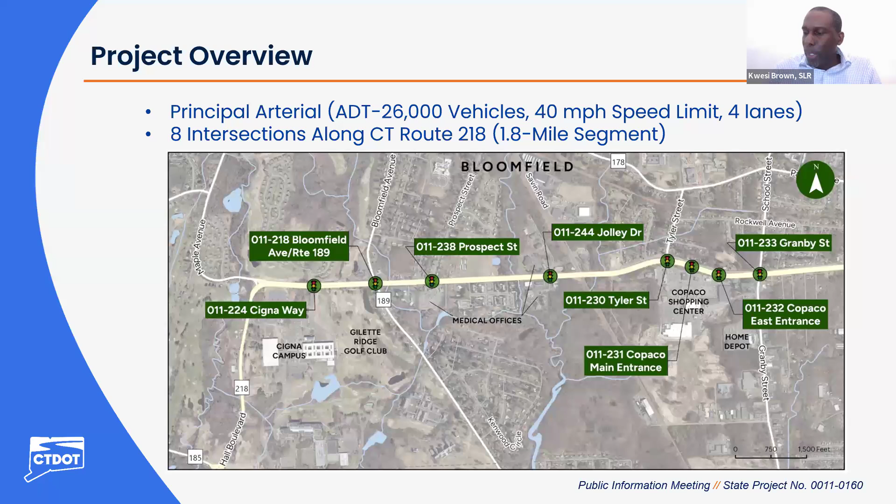Next slide, please. So why are we doing this project?

The goal, purpose, and need really is to replace aging signal infrastructure within the corridor. A number of the signal equipment is over 30 years old, and a good amount at the 20-year mark as well, so it's important to replace this aging infrastructure. Additionally, we're looking to improve traffic operations and safety, not just for motorists, but for pedestrians, bicyclists, and transit users within the corridor.

In terms of improvements, we're looking to upgrade the signal equipment at these intersections, enhance pedestrian accommodations, and introduce more cutting-edge technology, potentially flashing yellow arrow to enhance safety for left-turning vehicles, new vehicle detection, and improved communications within the corridor. Improved access to transit stops is key, along with improving illumination at transit stops and crosswalks.

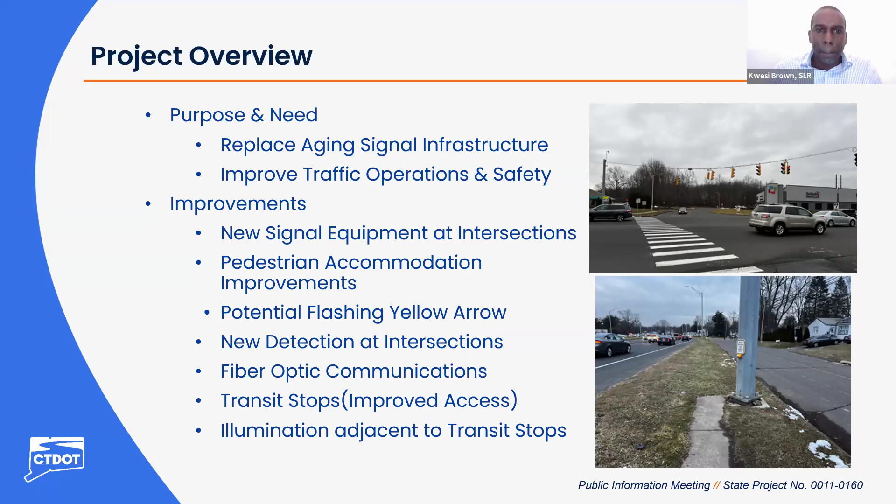Now to highlight the individual intersections in a bit more detail. This first one is the Cigna Way intersection, and you'll see a recurring theme as I go through the remaining seven. It's a wide intersection with only one crosswalk along the southern leg, the Cigna Way driveway. There's a sidewalk along Cigna Way on the western side, but very limited pedestrian accommodations, no pedestrian signals, and even the existing ramps need review since some are substandard.

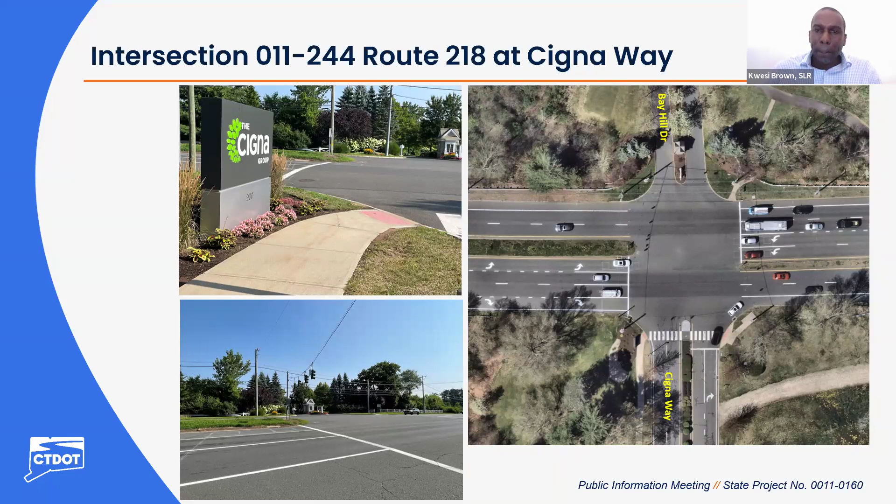Further east, the next intersection is Route 218 at Bloomfield Avenue, Route 189. This is a major intersection within the corridor, very wide, with no sidewalks, no ramps, and really no pedestrian accommodations. This intersection also recorded the highest number of crashes within the corridor for this project, accounting for about 30% of the crashes.

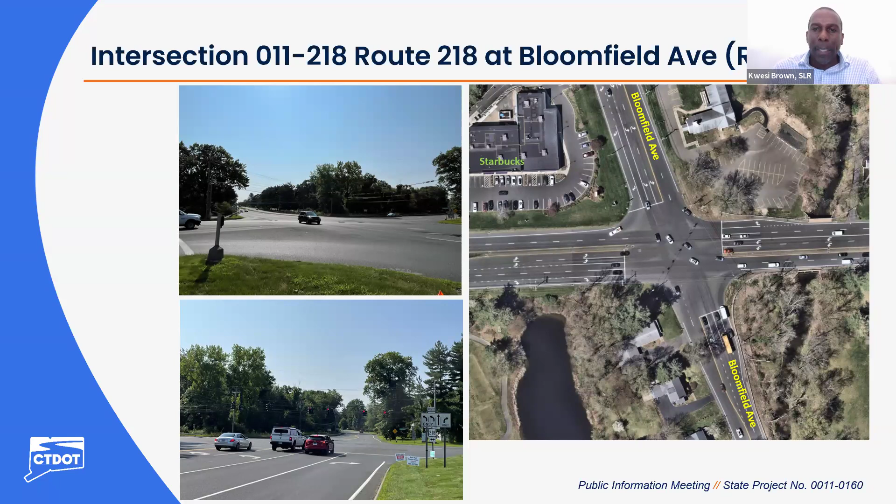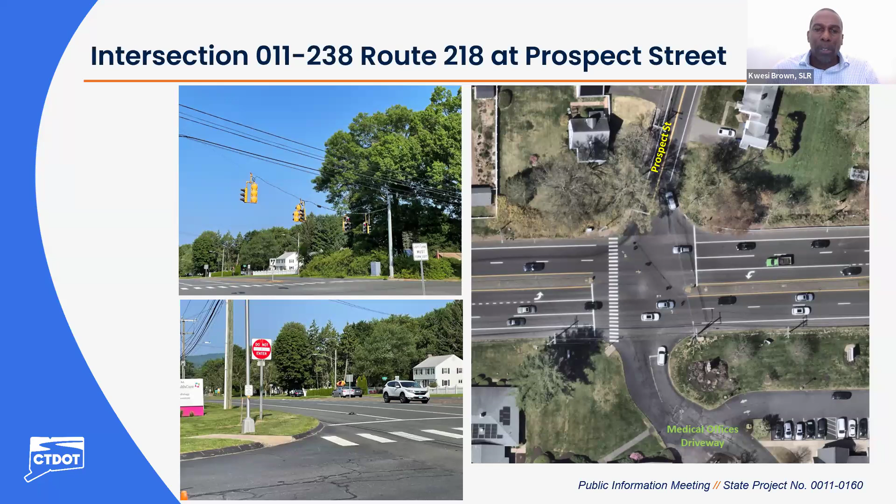The third intersection is at Prospect Street, near the 701 Cottage Grove medical offices. Again, it's a wide intersection with only one crosswalk. There are transit stops at this location, but substandard ramps for the ones that exist, and really limited pedestrian accommodations with no pedestrian signals.

At the Jolley Drive intersection, near the Hartford Healthcare establishment offices, there are two transit stops and a bus shelter at the southwest corner, along with some sidewalks. There's one crosswalk, and this is the only location with existing pedestrian signal equipment, which we'll be looking to upgrade as part of this project.

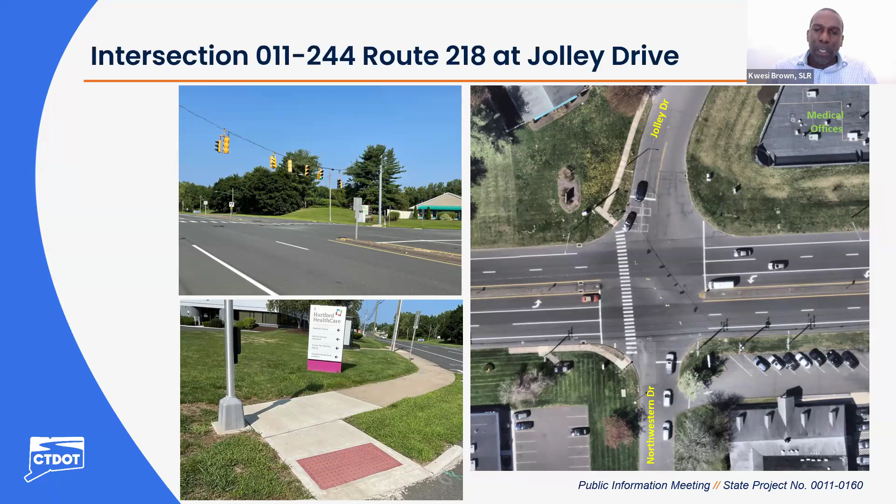This intersection at Tyler Street is the first driveway to the shopping plaza. Again, it's a wide intersection with two crosswalks, but the ramps leading to them are substandard, as shown in the photo, and there are no real pedestrian accommodations. The transit stops here are within the site, which I'll discuss further for the next two intersections.

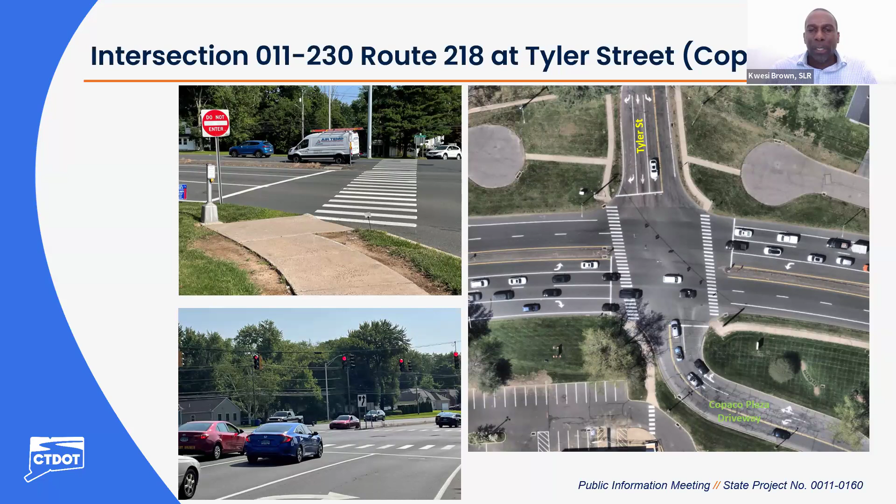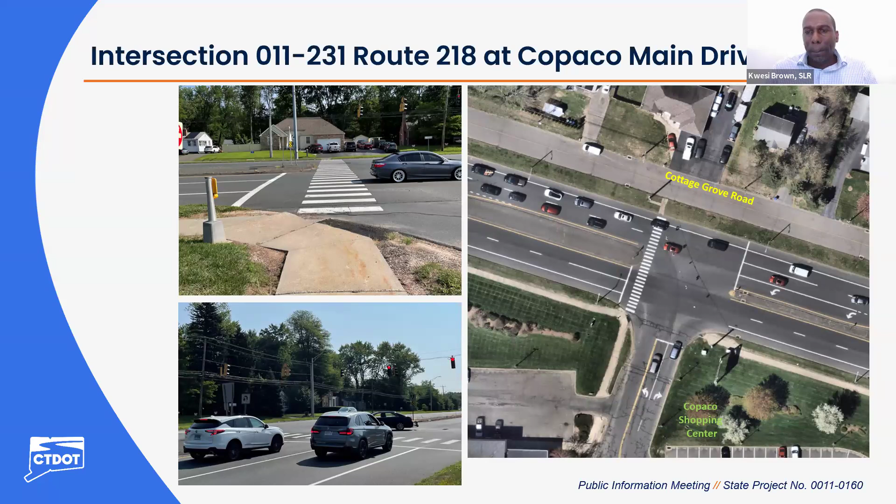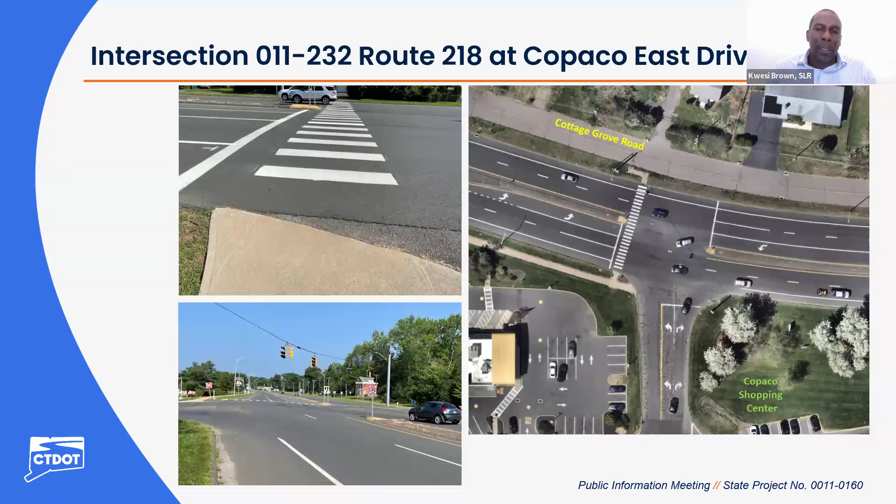This is the easternmost driveway to the shopping plaza, with one crosswalk and limited pedestrian facilities, again with substandard ramps, and the bus stops located within the shopping plaza area. The last intersection is the Granby Street intersection.

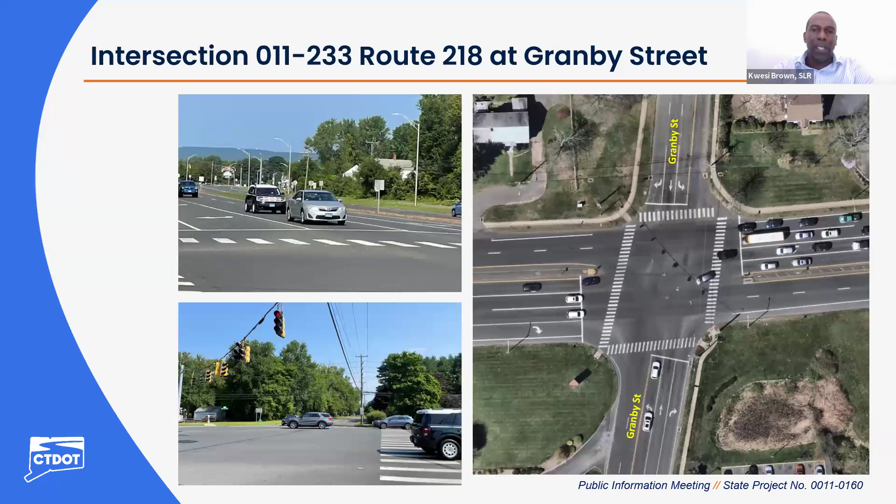There are 4 crosswalks, as you can see, but no pedestrian signals at this location, and ramps are substandard. So again, in the recurring theme, we're looking to enhance these accommodations and also improve traffic operations and safety within this location and in the corridor as a whole.

In terms of improvements for the traffic signal equipment, we're looking to install new mast arms, new signal heads, new and enhanced detection, new controllers, and also emergency preemption. Currently, there is no emergency preemption that gives priority to emergency vehicles going through the corridor. We are going to be providing that as part of this project, and also enhanced communication within the corridor for vehicles.

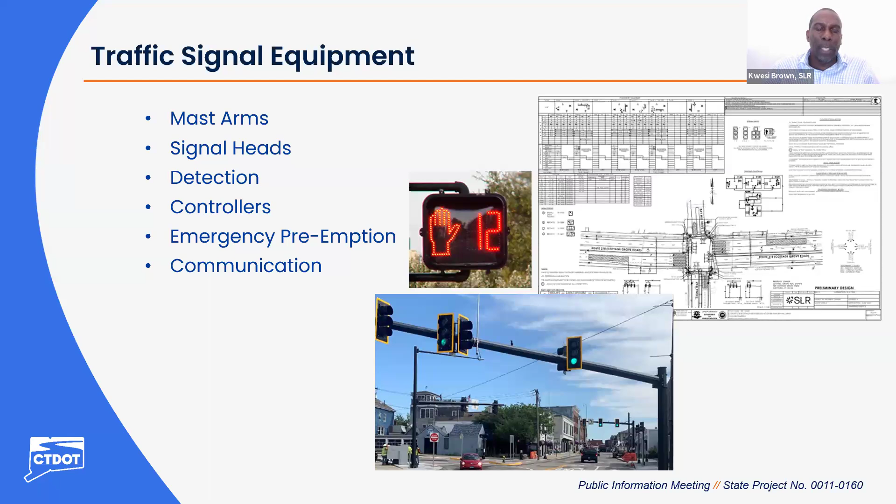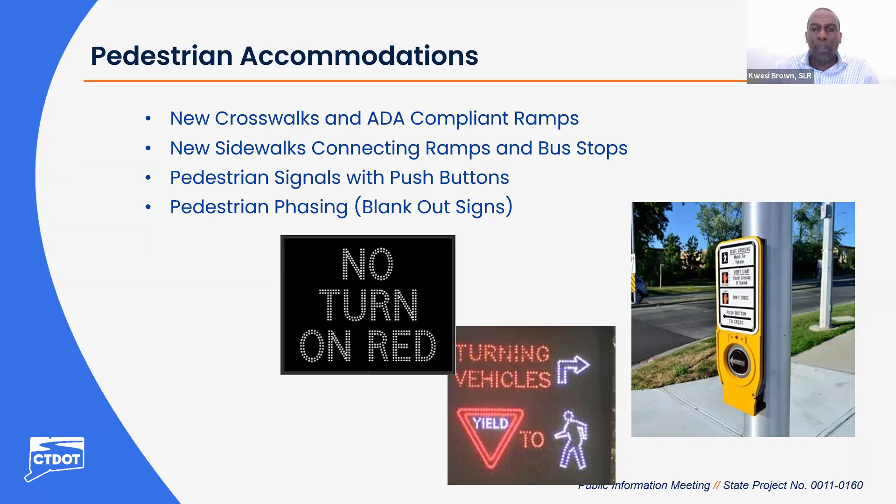So with that, I will hand over to Tom Daley to talk a little bit more about the detection and communication within the corridor. Tom?

Great, thanks Kwesi. With regards to the traffic signal detection equipment, as part of this project we'll be upgrading all of that equipment. Primarily two pieces of equipment regarding traffic operations: the first is a 360-degree bell camera, used for stop bar detection on all approaches to the intersection. The cameras detect the presence of vehicles waiting at the stop bar, which is used as a trigger to switch when to change the cycle from red to green.

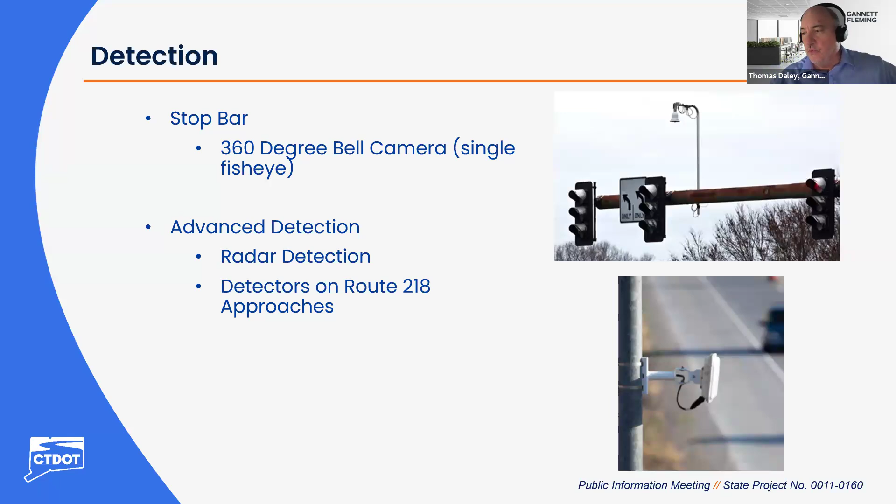The second piece of equipment is the radar detection. This is used for advanced detection of approaching vehicles, and it will be implemented along Route 218. Basically, this extends the green time on the traffic signal when it detects vehicles approaching from a distance, typically up to about 500 feet, allowing for better operations and the movement of more vehicles through the traffic signals along 218.

Next slide, please. As part of the project, we'll be upgrading all the communications systems between the signals. Currently, the signals are coordinated through some antiquated communication systems, a combination of wireless radio for several of the intersections and older copper communications, which is a little unreliable and hard to maintain.

So the entire corridor's signals will be linked through a fiber optic communication system, and then one of the intersection controllers will have wireless communications back to the Connecticut DOT Highway Operations Center in Newington. This communication back to the Operations Center allows the DOT to communicate with the system out there and react and respond to any operational issues or traffic incidents that may occur. With that, I'll turn it back to Kwesi.

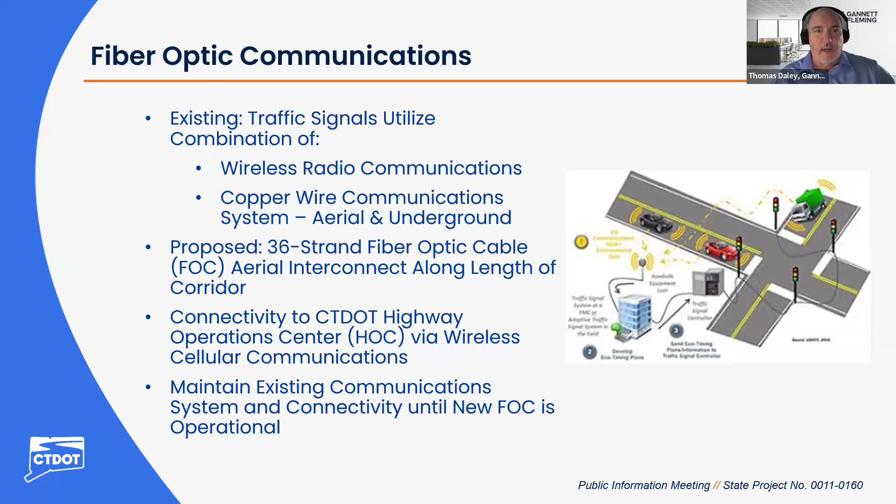Thank you, Tom. So moving on, we want to talk a little bit about project coordination, which is a key component of this project. We've been working closely with the Connecticut DOT as well as the town of Bloomfield. As a matter of fact, we met with town engineering staff last month to present the project and to also obtain feedback from engineering staff on the project.

Some of the things that came up that I thought was worth mentioning: at the Cigna Way intersection, the town had expressed that the green time for the left turn into the residential development was very limited and should be extended, and that's something that we are going to be addressing as part of this project.

The town did discuss the planned East Coast Greenway project, which goes through our project area, in particular along the eastern side of Tyler Street. This is at the Copaco Shopping Center, and then it continues along the southern side edge of Route 218 along the shopping center frontage, through and past the easternmost driveway at the shopping center. Again, that's something we are factoring into our design.

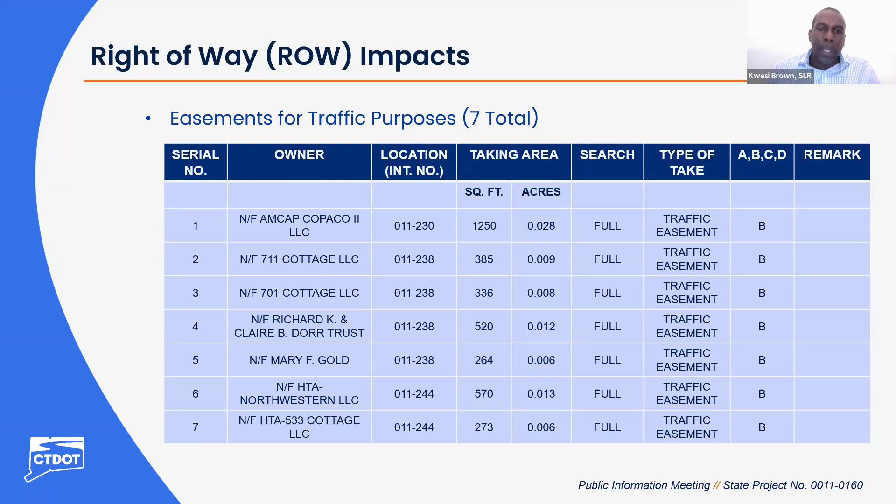With that, I will hand over to Kathleen Ericson to talk a little bit more about the right-of-way process. Thank you, Kwesi. My name is Kathleen Ericson, and I'm an assistant project coordinator with the department's Division of Rights-of-Way. Our office is responsible for acquiring the property rights needed for transportation projects throughout the state.

As mentioned previously, this project will require the acquisition of property rights, so I want to give a brief overview of our acquisition process. Before I get further into that, the specific property rights for this project are still being finalized and may change as the design progresses. Any required property rights will be acquired in accordance with Connecticut General Statutes sections 13A-73 and 13A-98E, as well as the Uniform Act.

Next, our office will determine the fair market value of those property rights, which will be used to establish an offer of just compensation. That offer will be sent to the property owner in writing, and a right-of-way agent will be available to meet with the property owner to explain the project, go over the specific impacts to their property, and explain the state's offer.

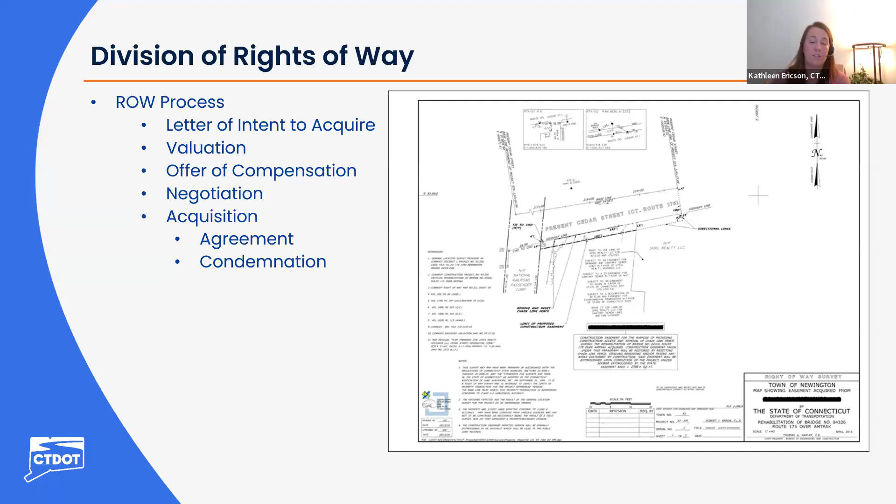Okay, thank you, Kathleen. In terms of environmental impacts, we found that there were no cultural historic property impacts within the corridor. There are some historic properties, but they are not close enough that this project would impact them.

The usual question that we'll get is, how much is this going to cost? For now, there's a budget of about 10.8 million for this project, about 80% federally funded, 20% coming from the state. As we go through the design, this amount will be further refined.

In terms of design schedule, we have gone through preliminary engineering and preliminary design. The next step for us is to go to semi-final, which we anticipate will be completed in September of 2024, and then advance to final design, anticipated for completion in February of next year. We hope to advertise the project in April of next year, with a construction start date in fall of 2025.

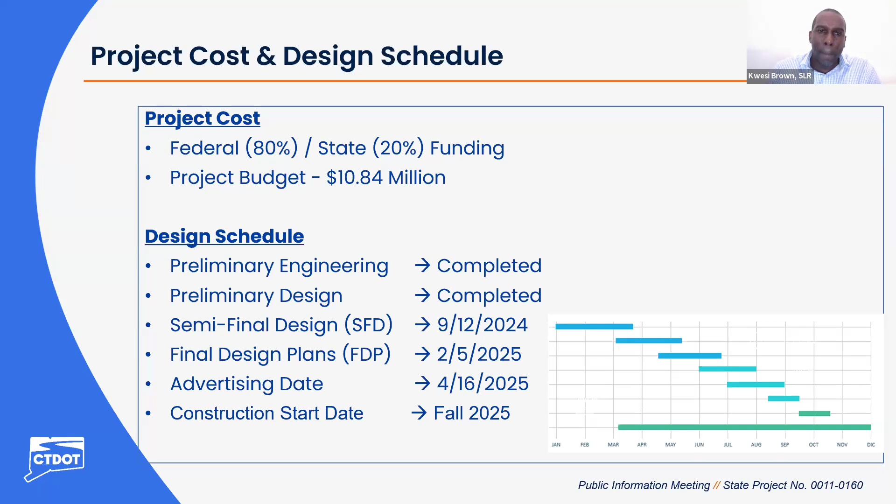In terms of next steps, we are looking to get input from the public. We will incorporate this feedback and use it to advance the semi-final design. We'll continue the design, further refine the right-of-way needs for this project, and continue coordination with the utility companies to identify any conflicts and what mitigation we can implement to minimize impacts for this project.

And with that, I will hand over to Jay Lockerbie. Great, thank you, Kwesi, Tom, and Kathleen. Really well done, I appreciate it.